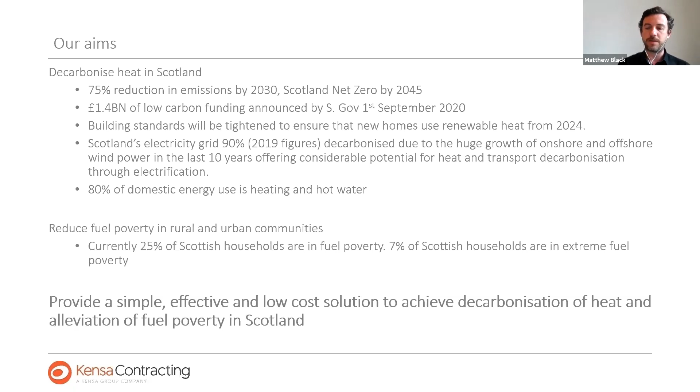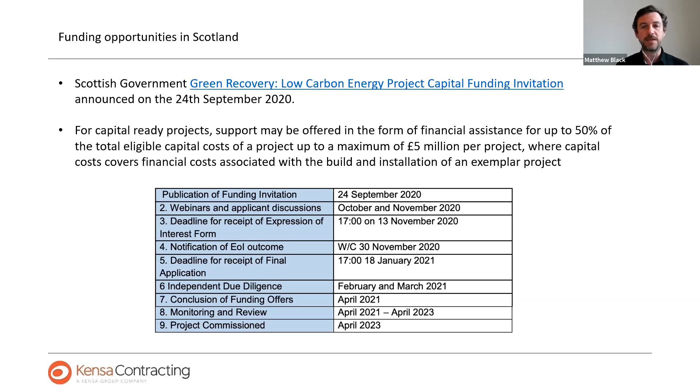There's also been the Green Recovery funding. Unfortunately, there was a deadline last week, so the fund is currently closed. But the reason I'm showing you this slide today is that this funding will come around again next year. So it's mindful to think about that when you're thinking about property assets and fitting low carbon solutions to them next year. It's good to have a project ready to go, so when this is announced again next year, you've already made some progress.

So a few words about the Kensa Group, who I work for. We started life as a ground source heat pump manufacturer about 20 years ago. We make ground source heat pumps and supply them to heating engineers and plumbing contractors throughout Scotland and the UK. Our factory and head office is in Truro in Cornwall. We also have a contracting business, Kensa Contracting, set up to deliver ground source heat pump installations, focusing on retrofit and new build, mostly for social housing, also private housing, and some innovation around district heating, fifth generation district heating, and ambient ground loops, which we'll talk about soon.

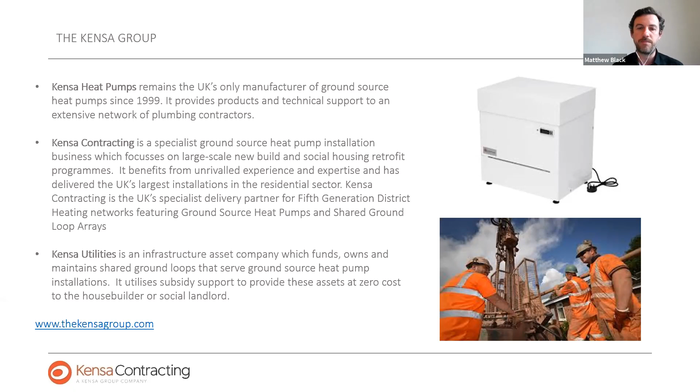We also have a utilities company called Kensa Utilities, and that is set up to own ground arrays and borehole infrastructure, which we will go on to talk about.

We were also on the BBC 6 o'clock news last week when Boris Johnson, the UK government, announced a 10-point plan for a green industrial revolution. We were on the news talking about that, specifically about one of our projects down in Oxfordshire. The UK government's committed to 600,000 heat pump installations per year by 2028. At the moment the figure is closer to about 15 or 20,000 installations per year, so there's a big ramping up to come.

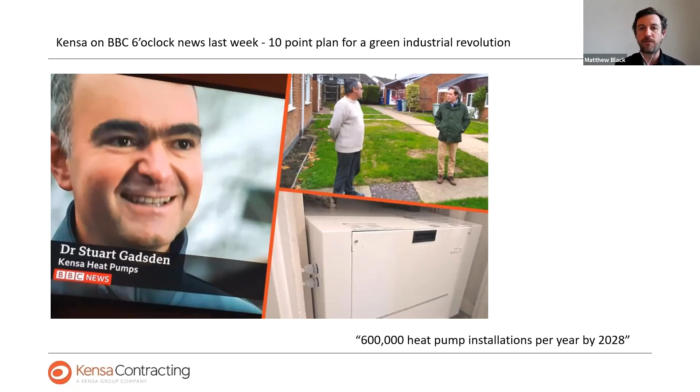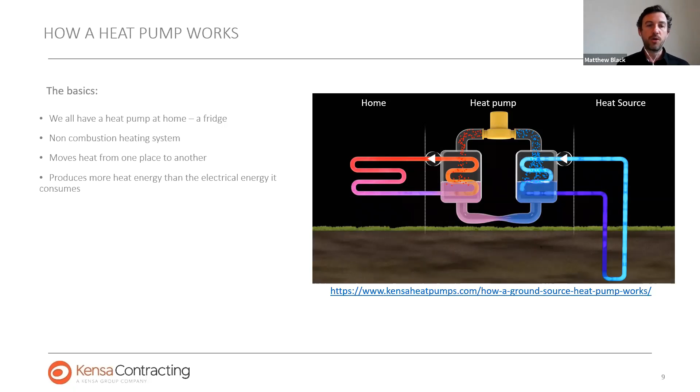I'm just going to touch on heat pumps. A lot of people will be aware of heat pumps, but to put it in layman's terms: we all have a heat pump already in our house, in our fridge. The fridge gathers heat from our food inside, moves that heat to the back of the fridge, and expels it into our kitchen. That's how a fridge keeps our food cool - it's basically moving heat from one place to another. That's the same for a heat pump.

For ground source heat pumps, we're moving heat from the ground. We're collecting a large volume of low-grade heat, maybe about 5 to 10 degrees Celsius. We're collecting that, then compressing and squeezing that heat, and as we compress it in the heat pump, the temperature goes up. So we can then deliver heating and hot water into your home.

The main thing to notice is that we need electricity to run the compressor in the heat pump, and for every kilowatt of electricity we use, we can get about 3 or 4 times the amount of heat - that's really important. The other important point is that it's unaffected by air temperature. When we're collecting heat from the ground, that heat is between 5 and 10 degrees Celsius all year round, so it's unaffected by air temperature, unlike an air source heat pump. If you imagine the depth of winter in Aviemore, on the coldest night getting down to -15 or even -20, a house there with a ground source heat pump will be able to provide all the heating and hot water needs no matter the outdoor temperature. That's not the same for an air source heat pump, which is completely reliant on air temperature.

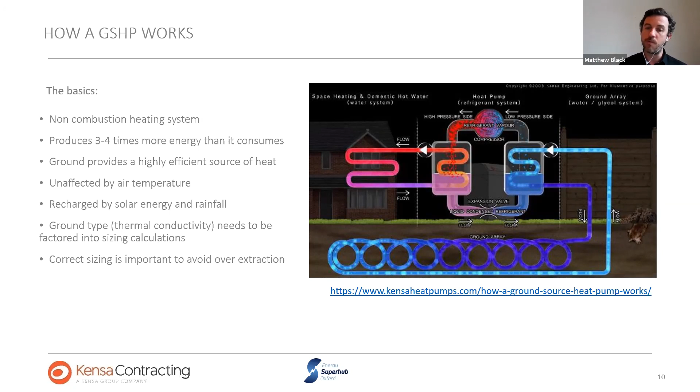It's important to design heat pumps properly. Some social housing providers will have stories of heat pumps going wrong, and that's not normally to do with the heat pump itself, but with the way it's been designed or installed incorrectly. So it's important to design these properly. We're removing heat from the ground and putting it into your home, and that is recharged through the year through rainfall, which percolates into groundwater, recharging the heat from the ground throughout the year.

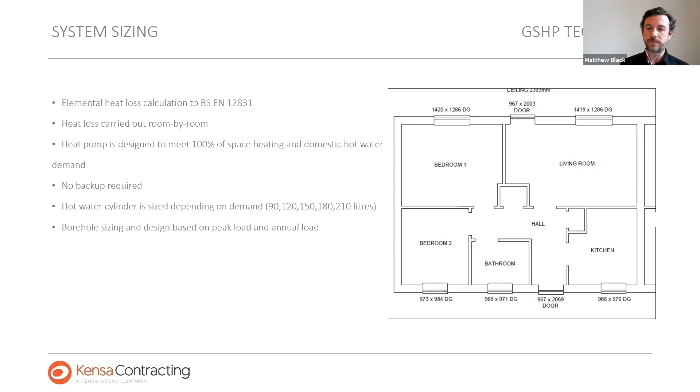When we have a group of housing to work on, we'll do some design and sizing. We'll be designing the heat pump to meet 100% of the space heating and domestic hot water demand. There'll be no fossil fuel backup from the system, and we'll also provide the house with a hot water cylinder to provide hot water.

Boreholes and heat collection - there's a couple of ways in which we do this. Let's go back to the previous slide there. Pardon, it all went a bit too fast.

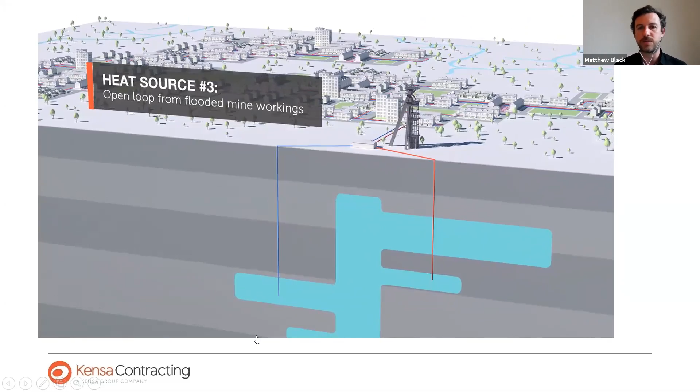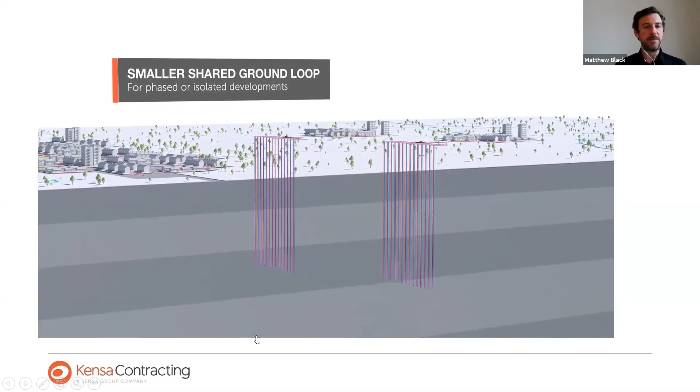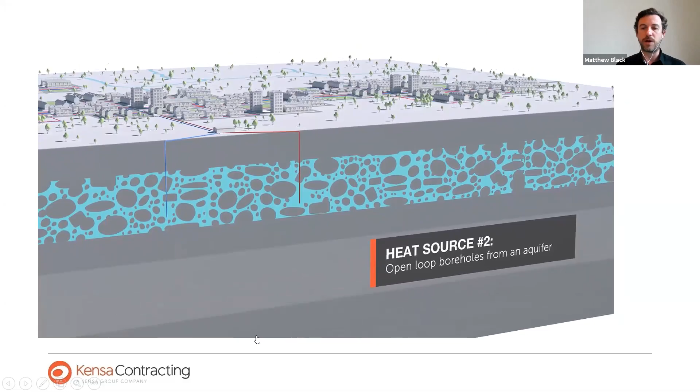We install boreholes. We also collect heat from underground aquifers and also from flooded mine workings. These are different heat sources we can use for the ground source heat pump. We can also use water - instead of putting pipes in the ground, we can put pipes into a freshwater loch, a canal, or the sea, and use the heat from that water resource to heat our homes. I'll show you a few examples of these projects later on in the case study section.

Ground source heat pumps are the most efficient and reliable heating system available today in the UK. They're unaffected by air temperature, and as a result we get the lowest carbon emissions from this heating system and the lowest energy bills. The energy bills will be comparable with gas, slightly lower, but they'll be the lowest end-user bills of any heating system you can install. It's ultra efficient and reliable, and these heat pumps sit inside the dwelling, not outside - it's not a fan sitting outside a house. Because of that, our heat pumps last around 20 to 25 years, much longer than an air source heat pump and much longer than a modern condensing gas combi boiler.

The ground array itself is a borehole with pipe in it, the same type of pipe used for water mains or gas mains. Once that's in the ground, it would be there for 100 years or more. So this is a long asset life infrastructure that we're installing here.

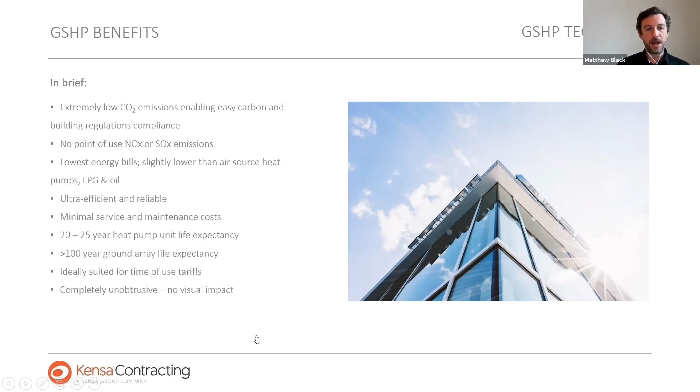Once we install these heat pumps, we expect the ground array to be there in excess of 100 years, certainly throughout the lifetime of the building, and all that will be required is to replace the heat pump once every 20 or 25 years. There's no visual impact, so when you go to one of our sites, you won't actually see anything because the heat source is in the ground, the pipes are in the ground, and everything is reinstated after installation. The heat pumps themselves are in the houses.

We've been delivering district heating and low carbon heating solutions in Scotland quite a lot over the last few years, and a lot of housing providers traditionally have used centralised district heating. What that basically involves is a central heat source, using the picture in front of you just now, and that might be an air source heat pump, a gas CHP boiler, or a biomass boiler, which heats hot water to a high temperature, up to 90 degrees Celsius.

It then pumps that hot water through a series of insulated pipework to the end users. When we get to the end user, who could be a house, a care home, or offices, each property will have a heat interface unit, which then delivers heat and hot water to that customer.

A few disadvantages here: if the central plant goes down, then all of the downstream customers are without heat. That's a huge problem when you're a social housing provider and you get a call saying there's no heating and hot water to your tenants. That's a big hassle and a bit of a nightmare.

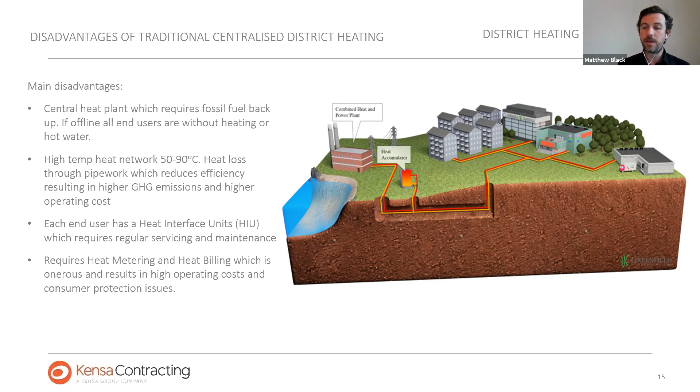So Kensa, we came up with this solution, called a shared ground loop array. Essentially it is a group of boreholes. The little diagram in front of you shows 5 boreholes connected to 4 properties, but it could be as simple as 1 borehole connected to 2 properties. That is basically a communal array of boreholes, and the water circulating around that is typically around 10 degrees C, so there's no heat loss through that pipework, and the heat is only upgraded in the heat pump.

Each home has an individual Kensa shoebox heat pump, which upgrades the heat. The beauty of that is there's no heat loss in the pipework, but also the heat pump is connected to the electricity supply, so the tenant just pays their electricity bill as normal, and that's how they pay for the heat. It means they have the freedom to shop around for their electricity supply, and it also means the social housing provider does not need to bill any of their tenants.

So it's low hassle, low operation costs. There's no external plant, no external pumps, nothing for the owner or operator of the system to look after - it's just the heat pumps in each individual home. This is the type of system we've been putting into a lot of housing in the UK. It's applicable to all housing types - we'll go on to talk about that shortly.

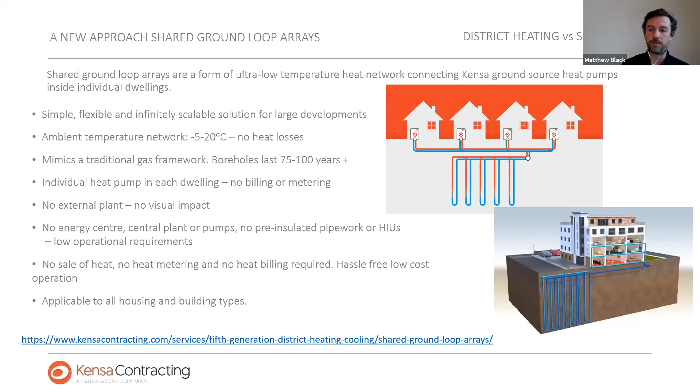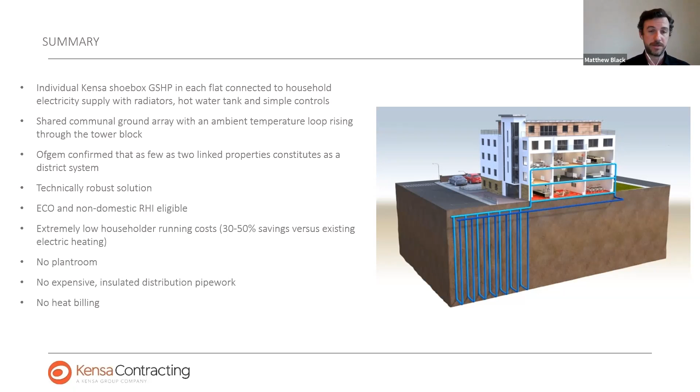So just to summarise, we have a shared ground array, which is distributing ambient temperature heat to each heat pump. We have simple controls and radiators in each house. The scheme is eligible for funding, and it's low cost for the householder. Typically, if we're replacing electric heating, the tenant will save about 30 to 50% on their fuel bills. There's no plant room, there's no heat billing, and there's not very much for the social housing provider to maintain other than what's in the houses.

This must be in a 3-bedroom or 4-bedroom property, as we need a slightly bigger hot water cylinder to provide all the hot water to that property. So there's a little bit of space needed to fit these, but the shoebox is the quietest and the smallest ground source heat pump available on the UK market.

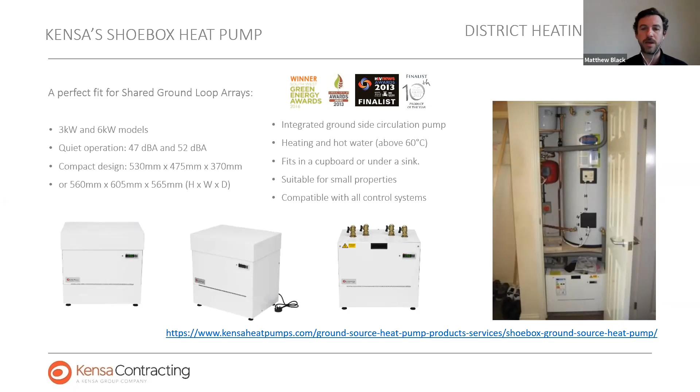For heating controls, there is nothing complicated here. We have normal radiators that are sized slightly bigger because we have a lower flow temperature. We have a standard thermostat and a standard timer, and TRVs on the radiators. So there's nothing fancy, it's just normal central heating controls as you would expect with a gas central heating system.

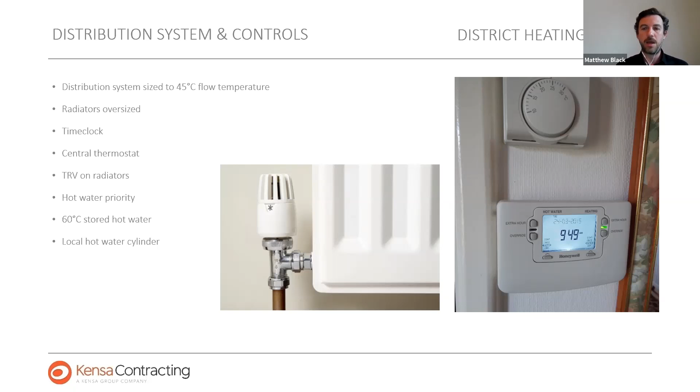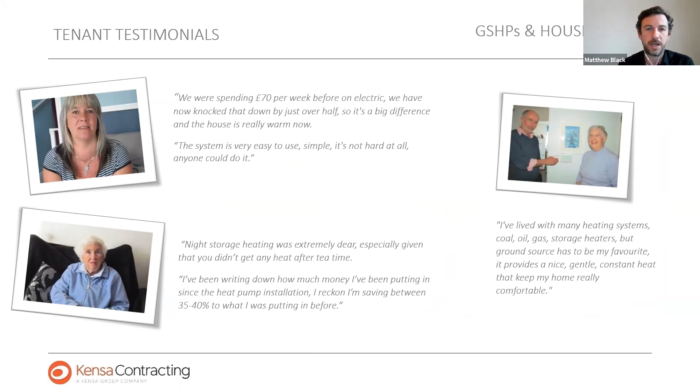Basically, here's some testimonials from some of the tenants. These are tenants that will have had electric storage heaters in their houses beforehand, and we've taken that heating system out and put in the ground source. The lady at the top reckons she's saving over half on her electricity bill, and the lady at the bottom about 35–40%. We'll look at a few case studies shortly.

So drilling boreholes, we get a lot of questions about that, and if you have questions, please save them up for the end. What we basically do here is we drill into the ground, typically 100 or 200 meters. We've recently, at one of our sites down in Blackburn, installed a borehole that was 300 meters. If you imagine the highest tower block in Glasgow is 75 meters tall, think about 3 or 4 times the height of those tower blocks but under the ground - that's how far we drill down.

We then have plastic pipe, which has been made in our factory, and we bring that to site and install it into the hole, and then we backfill the hole and fill it up with grout. We then connect the boreholes horizontally in trenches and bring them together to a manifold, which then connects to the properties. So this is a bit of the drilling.

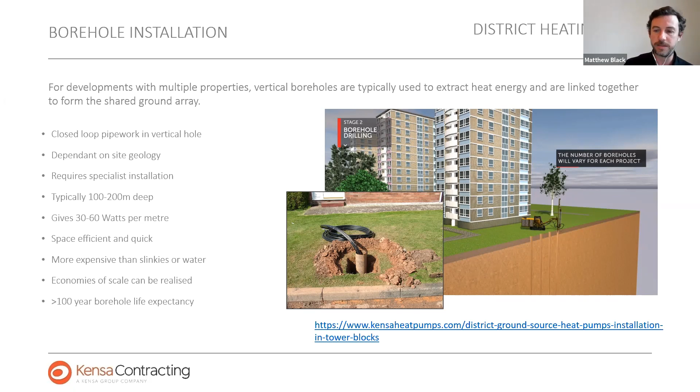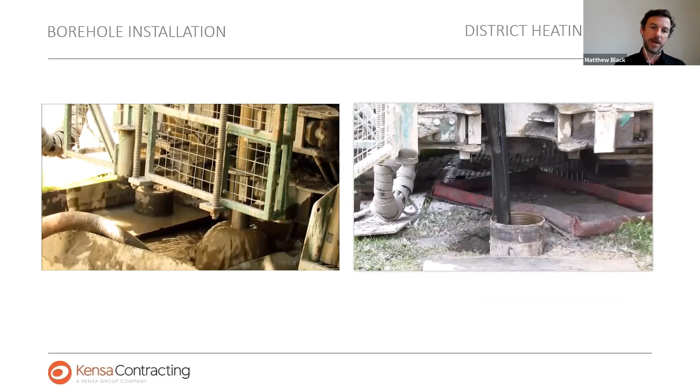So what we have here, this is not water coming up from the borehole - this is water that we are circulating into the borehole to bring up sands and fines and stones. We then take that off to what's called a mud puppy, which is essentially a skip with a big sieve in it, and that takes off all the fines and stones. We then recirculate the water back down the borehole, and to the right there you see the rods which we add on to the drill bit until we reach the required depth.

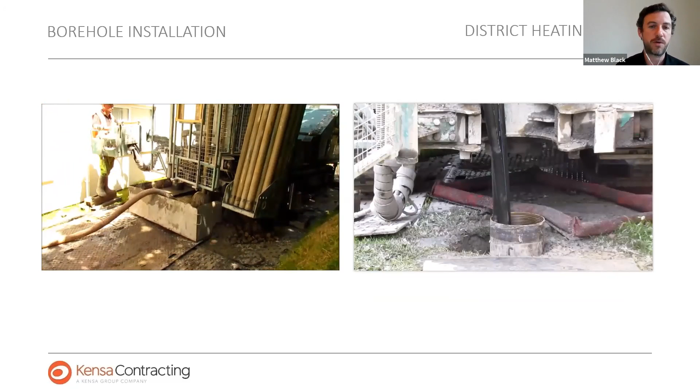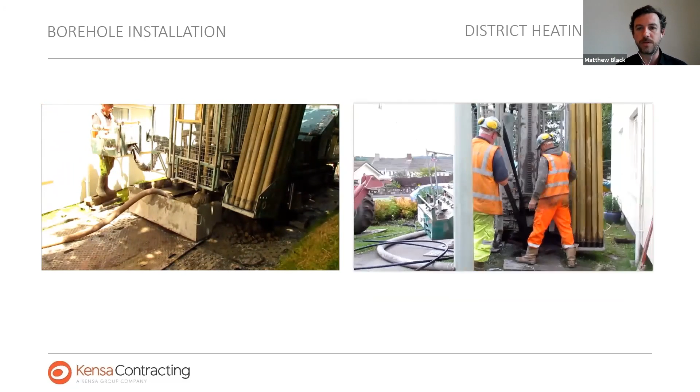On the right hand side you can see the drilling guys. They are installing the ground loops - this is plastic pipework that they're installing into there. I think this is a double probe, so we have quite a number of pipes there. Usually it's just a single probe, so we'll just have 2 or 3 pipes going into that borehole.

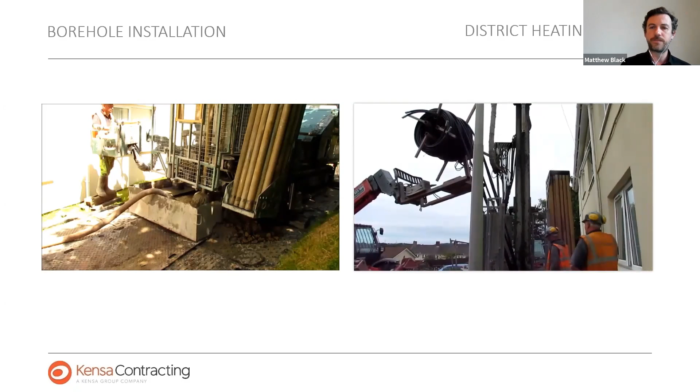So Kensa Contracting, we do feasibility studies, geological surveys. We provide a whole project managed turnkey solution. Essentially, we design the systems, we select them, we install the ground array, we install the pipework and the radiators and all the controls for the householders. We actually do tenant liaison as well, so we'll come around and talk to all the residents in a street of housing and inform them of what's going on and when things will be taking place.

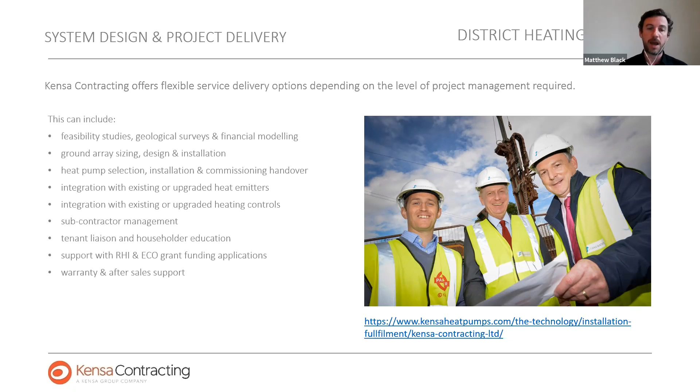We get support for our clients through the Renewable Heat Incentive. Historically, shared ground loop arrays have been eligible for the non-domestic RHI, which basically is an income over 20 years - it's a metered, guaranteed income over 20 years. We'll do those applications on behalf of those clients, and then we'll also provide warranties and after-sales support for those systems as well.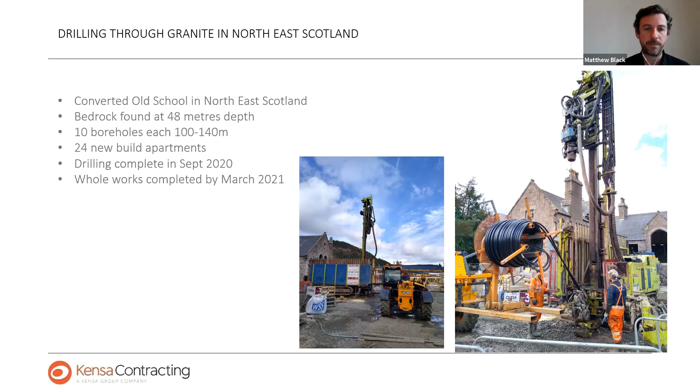What we've done here is we've drilled through the granite and drilled 10 boreholes to service these new build apartments. The drilling is now complete, and the builder is now just finishing off the build, and then they will install the heat pumps, and that will be completed in the next few months. This is some of our bigger projects - these are tower blocks in Sunderland that are owned by the Gentoo group.

Instead of boreholes here, what we've actually done is extract water from underground aquifers, and we're taking that water out and running it through a heat exchanger, and that's the heat that we are then taking off, piping through these tower blocks and into each individual flat.

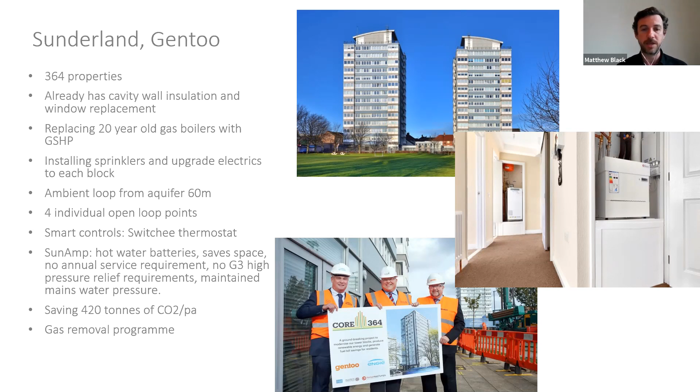In the picture you'll see the Kensa shoebox in the foreground, and in the background a SunAmp phase change battery. So instead of an unvented cylinder, the customer's chosen to put in a phase change battery instead. This saves space and means they don't have to do annual inspections of the hot water cylinder every year. They also have Switchee thermostats - smart internet-enabled thermostats that each tenant has. This is a project where we've installed 364 properties across 7 tower blocks in Sunderland.

This is another one of our tower block projects, in North London. This is 8 tower blocks, 400 flats, and all these properties were previously heated by electric storage heaters. So we were able to save customers considerable amounts of money on their heating bills.

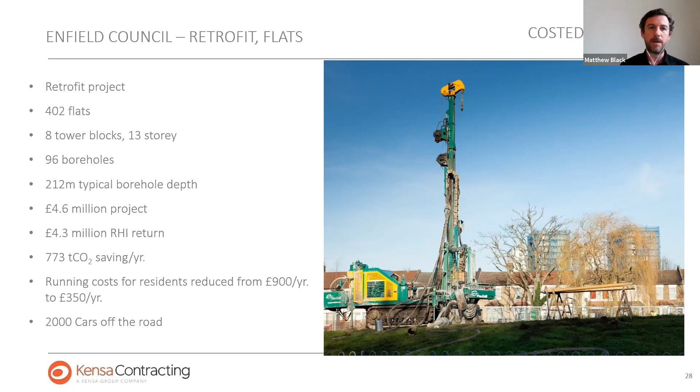There you can see it. Before they were paying £900 per year, and now they're paying as little as £350 per year for their heating and hot water. So 8 tower blocks, all retrofitted by Kensa Contracting, a really good project saving lots of carbon emissions, and we get an RHI return - over £4 million of RHI for Enfield Council on this project. This is another housing association in England.

What happened here was that we delivered a small pilot project for Together Housing, and off the back of that they were so impressed with our solution that they decided to roll it out across their entire property assets. So we're halfway through installing up to 1,000 ground source heat pumps - we've already done about 500.

45% saving on running costs for all the tenants, and a considerable income through the non-domestic RHI, and that system will be there for a really long time. We won't be replacing the heat pumps for 20 to 25 years. So that's a great project.

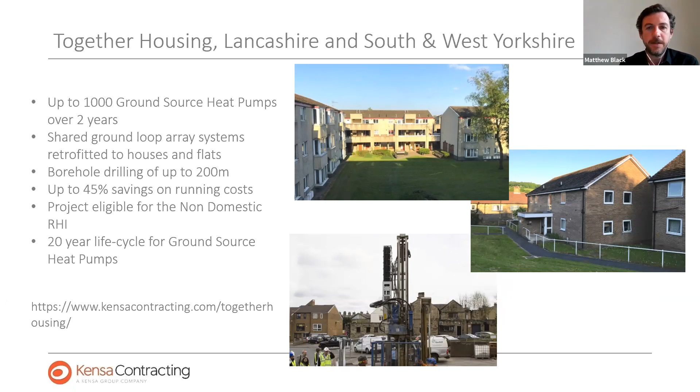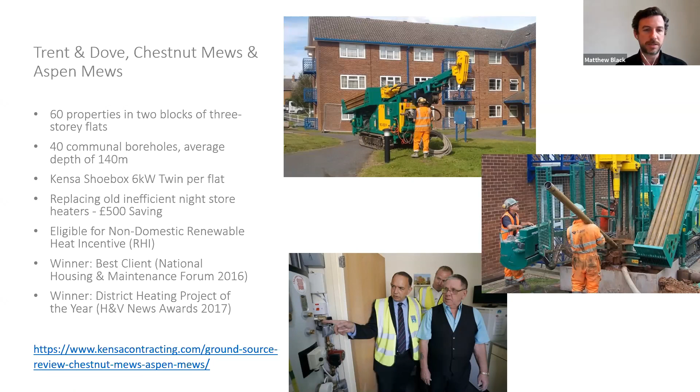This is another small social housing project - 60 properties, 40 boreholes. Again, great saving against night storage heaters. And this project has won a few awards.

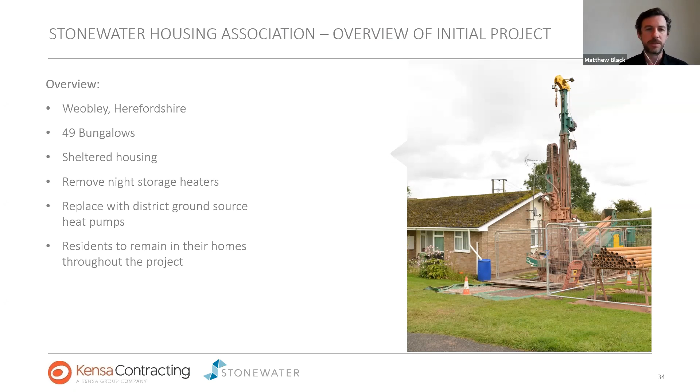I'm now going to take you through a step-by-step situation on one of our projects. This is sheltered housing, with a lot of elderly and vulnerable residents, and they've all had night storage heaters. It's bungalow sheltered housing on this project in Herefordshire.

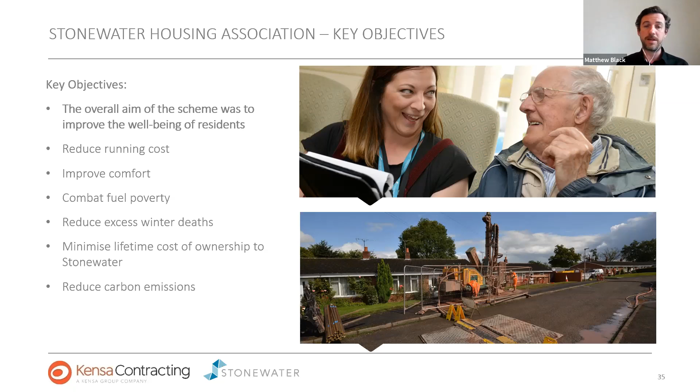The overall aim of this project was to reduce the running costs for the tenants and improve their comfort. A lot of the night storage heaters were running out of heat by evening, which is when residents really needed heat. There were also issues with damp and condensation in the houses, causing respiratory issues for some residents. So it's really about improving the comfort and health of these residents, combating fuel poverty, reducing carbon emissions, and minimising the lifetime cost of ownership for the housing association.

The external work took 8 weeks to complete. We drilled 25 boreholes, so each borehole serves 2 properties. We then connected all that pipework up, drilling the boreholes and connecting them all in trenches to pipework.

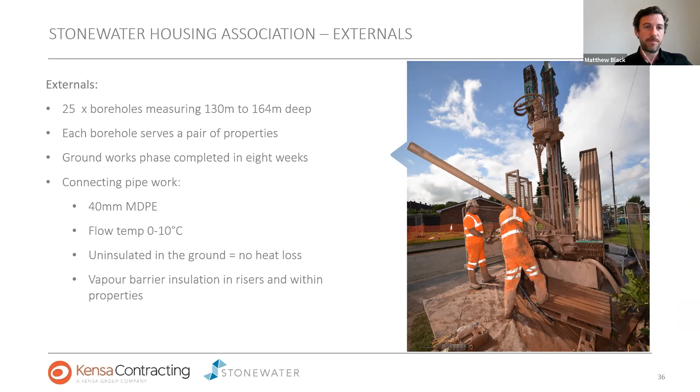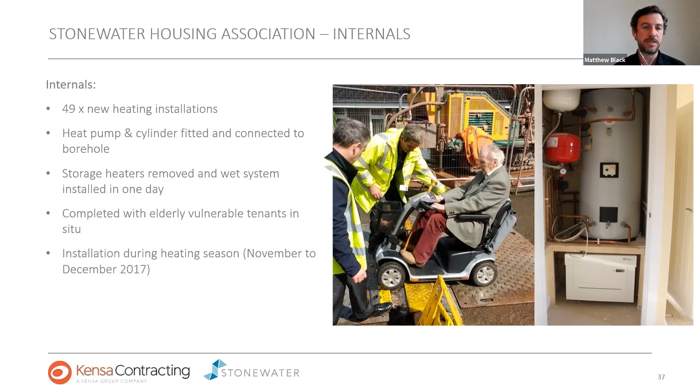For the internals, on the first day, once the ground array was installed, we installed the heat pump in each home and the hot water cylinder, giving the tenant hot water. They then went wet, and the next day we came back and removed the storage heaters and completed the wet system all in one day. All residents stayed in situ - they didn't go anywhere else. We installed the whole project while they remained in situ, and this was during the heating season, in winter 2017.

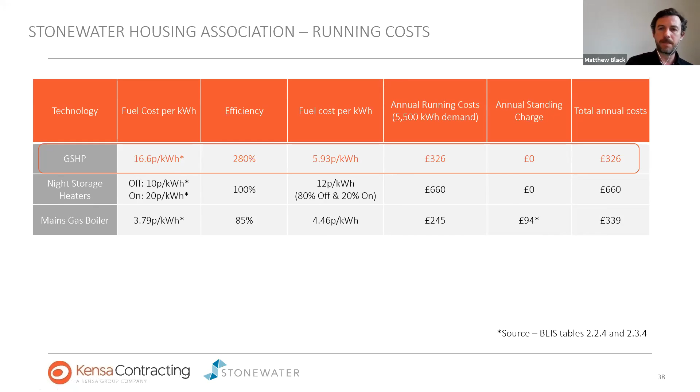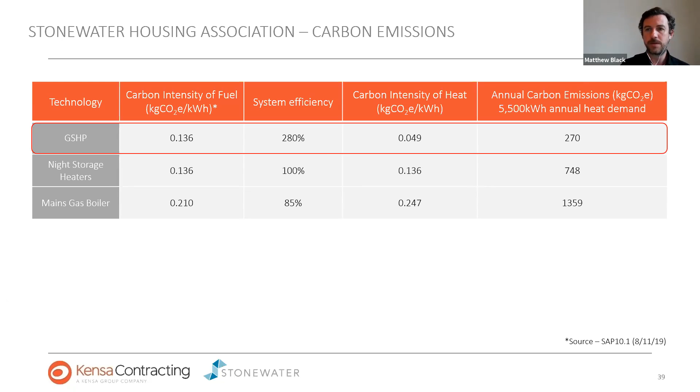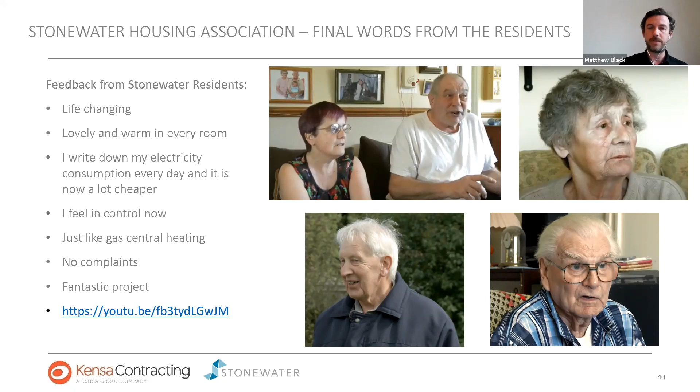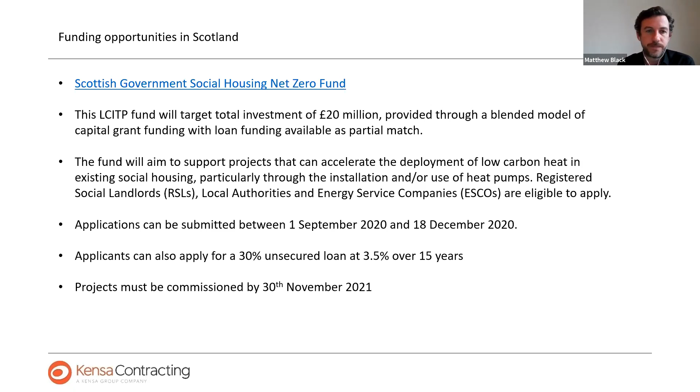That's really important, so what I encourage you to do now is have a look at our website, kensacontracting.com - there's a fantastic wealth of information there. There's lots of case studies - today we've just talked about a couple, but we've done hundreds of these projects up and down the UK. There's great videos, animations, blogs, different solutions talking about extracting heat from mine water and using water for heating and open loop solutions. There'll be articles talking about using ground source heat pumps for cooling and heating, and also using time of use tariffs to offset electricity costs.

So there's my contact details as well. Have a look at the website, feel free to get in touch if you have any groups of houses you'd like us to look at, and I'll hand over now back to Cassandra and the team, and we can run through any questions you might have. I'll just stop sharing my screen for a moment.

Thanks, Matthew. That was really interesting. It's nice having the little animations of the different questions.

I'm not sure we've got any questions at the moment - I'll leave it open for a minute. Question I was going to ask - as you mentioned in the last slides, we've got quite tight timescales for these funding schemes. What is the typical timescale in terms of the planning and feasibility side of things?